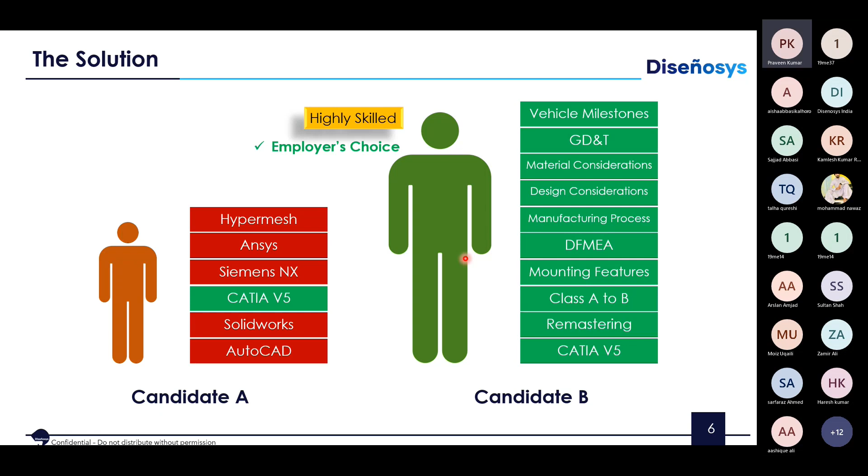So going down to the next topic. Before we begin, we have to understand how an automotive or a car is being designed. I'll just take you through this fast.

Initially, the planning phase will be done where the design engineer or industrial engineer, the management team, or the different benchmarking teams will understand what kind of car is needed.

After the planning is done, it goes down to the designer who does the concept study, and during concept studies, they will make the clay modeling. After clay modeling, they will go for the vehicle architecture.

Vehicle architecture is a stage where the vehicle architecture team will decide where your engine has to come, where your packaging has to come, where your seat has to sit, what should be the height of the car, and how many doors your car needs. So the entire packaging of the car will be done by the vehicle architecture team.

Then it moves on to the detailed design team. Each part of the car will be designed by a separate team. For example, transmission will be designed by a transmission team, the engine will be designed by the engine team, the vehicle body will be designed by the exterior team, and there will be an interior team. The seats will be designed by the seat team.

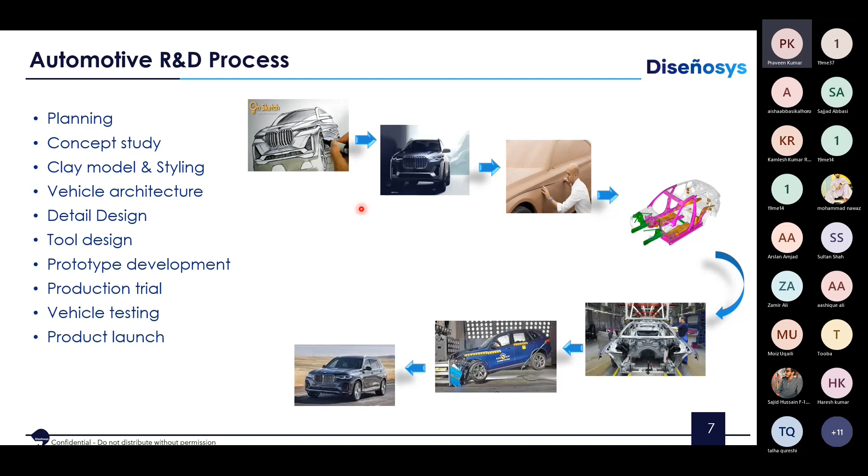My next topic is about understanding what software is required. A lot of people use NX, Creo, ANSYS, and there are many different softwares available. So the question is, what software should I learn? That's the question asked by a lot of design engineers.

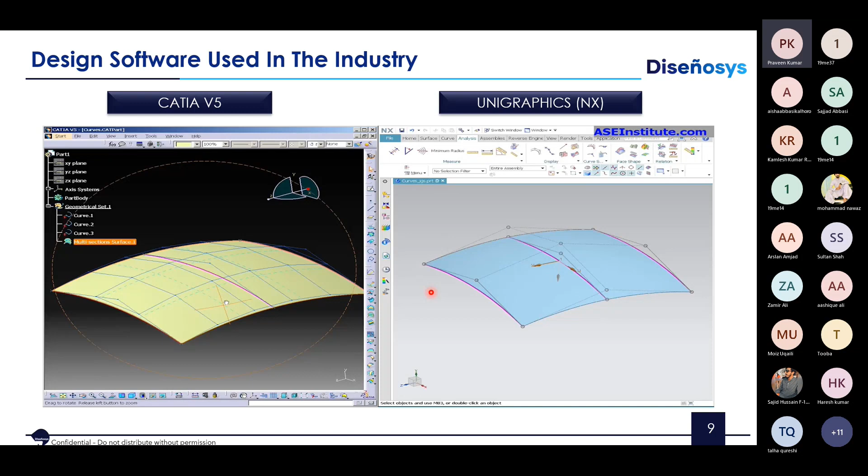The automotive industry mainly uses only two softwares: CATIA V5 and Unigraphics NX. Companies like Hyundai, Toyota, Volkswagen, Ford, and PSA—which is now the Stellantis Group—along with Honda, Renault, BMW, Mahindra, and Tata use CATIA V5. Companies like Nissan, Suzuki, Daimler, Mazda, and Fiat use NX.

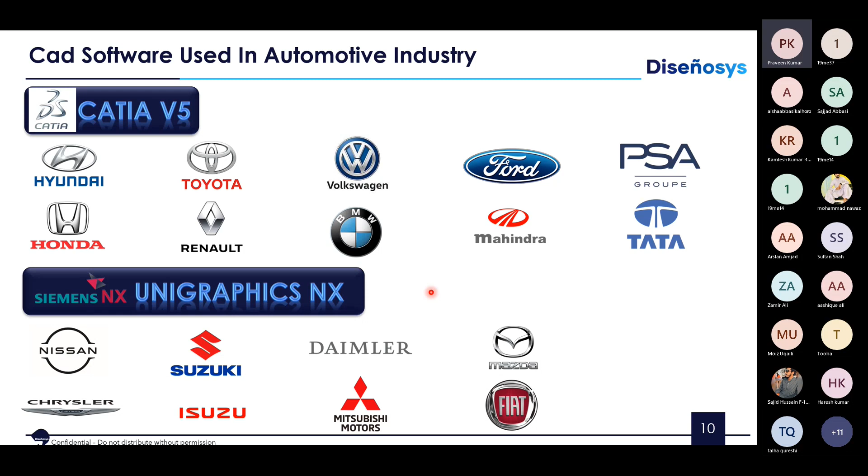A person working on design will not work on analysis, and a person working on analysis will not work on manufacturing. So focus on only one domain—you don't need to learn both design software and CAE or analysis software, because a single team won't cover both; there are different teams working on these concepts. If you're working on analysis using tools like Ansys or Hypermesh, you won't be working on the actual 3D modeling or the NPD activities. So focus on one particular domain and gain your skills there—that is much more important.

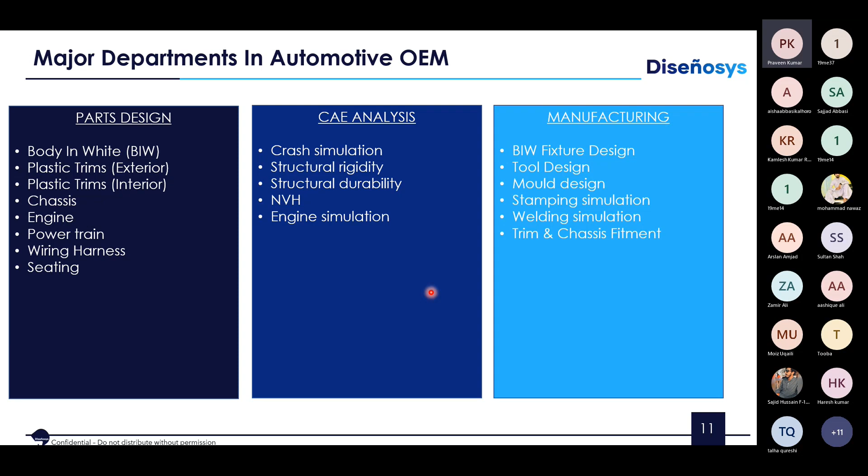Now coming to the different domains in the industry—when we look at any automotive company, this is uniform across the world. From Ferrari to Lamborghini to Ford to Tata Motors to Hyundai, any country, any cars—these are going to be the common departments in the industry.

The first one is the body department, which has both exteriors and interiors. The exterior body of the car is made out of sheet metal, and we call this body in white. Body in white is the outer frame of the car, made entirely of sheet metal. It's called body in white because before painting, it looks entirely white in color. This is the body-in-white frame, and these are the closures—the parts that close the body in white are called the closures of the car.

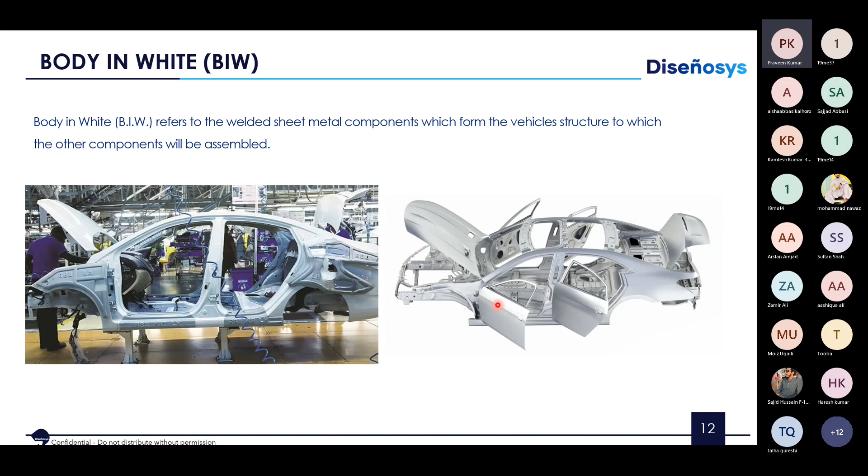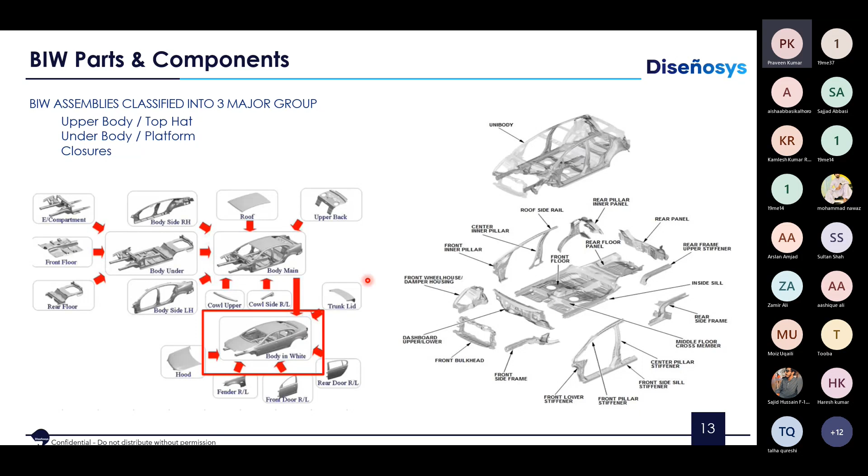There are design considerations required here. To understand how to get into body in white, you need to know the different body-in-white nomenclatures—what components come under body in white—and then understand the design considerations in body in white. For example, if you are making a draw, you need to know what should be the minimum depth of the draw and what should be the maximum depth of the draw.

You can't go beyond the maximum depth and you can't come below the minimum depth. These are basic standards required. For example, why do we need a backdraft? What is a backdraft? Why do we need it? Is backdraft allowable or permissible in the industry?

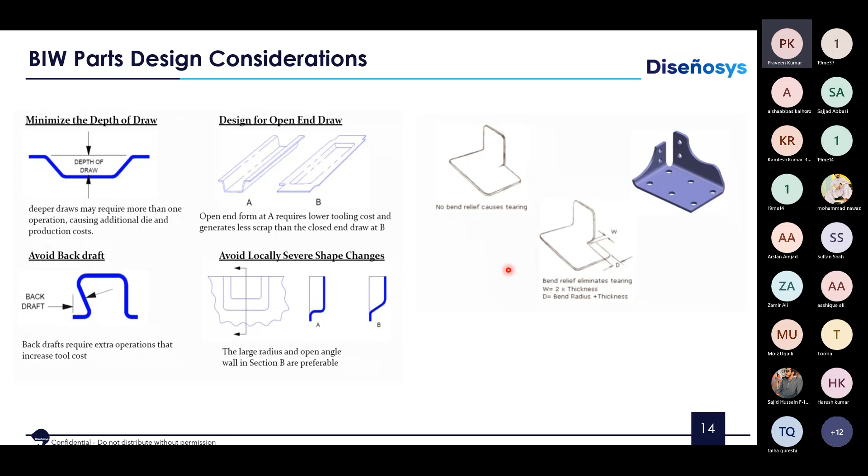What should be the minimum flange length? What should be the minimum bend radius? There are basic standards required which are not being taught in the current university syllabus. And even if it is being taught, different industries will have different standards. But when it comes to the automotive industry, there are basic common standards used across all industries in the world. So you need to understand the basic considerations used in the industry.

Then coming to the next thing is material selection. The body of the car is entirely made of sheet metal, but the sheet metal used here will not be the same sheet metal used there. We'll be using different sheet metal materials in different places. So what material has to be used where? That knowledge is very important.

For example, these red color areas are high impact areas, that is high stress areas. Here you need very strong sheet metal. Whereas the violet color areas, the cowl areas, need the least strength of sheet metal. So you can use a light sheet metal component to reduce the weight of the car. Reducing the weight will reduce the safety of the car but increase its performance. But in areas like this, you can't use light sheet metal because this is where the vehicle has to absorb the crash. You need very strong sheet metal that can absorb the impact of any crash. So material selection is very important.

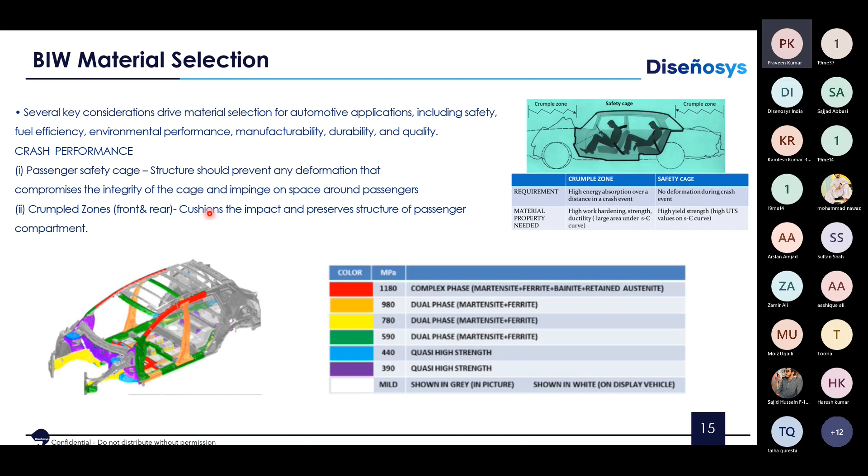So that's exactly what the different domains are. I showed you the basics of BIW. Similarly you need to understand sheet metal plastic trims, powertrain, chassis, steering system, seating domain, suspension, axle, brakes. These are the different domains in an automotive industry. So the candidate has to choose any one particular domain.

He has to choose one particular software, either CATIA V5 or NX, then choose one particular domain and gain all the skills to get employed. Now the question is, what will he do once he gets employed? How to get employed and how to proceed with his career.

If he graduates and gets employed in an automotive car design company, he starts as a GET, graduate engineer trainee, or graduate apprentice trainee. From there he moves to a design engineer position or senior engineer. Then within 5 to 8 years of experience, he moves into a team lead or associate manager position. After 8 years, he can become a design manager or design lead.

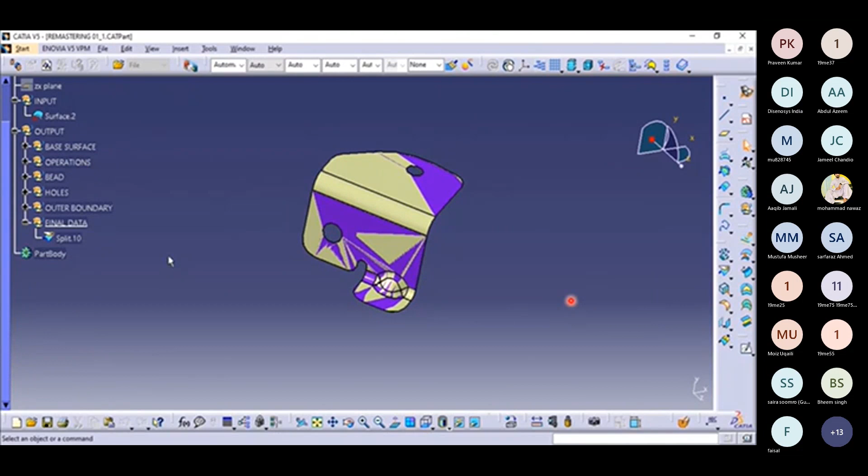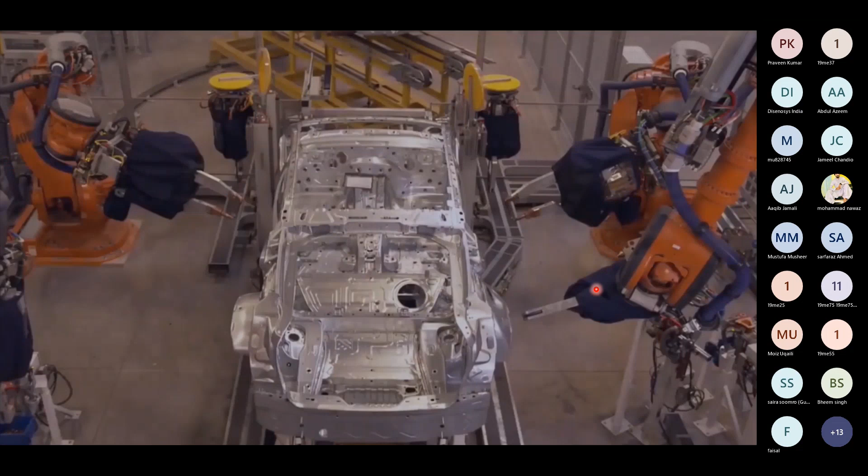So this is what I was talking about, this remastering. The component that you saw was a basic small bracket. It might look very easy to you. When you do that in part design, it's very easy to create.

But in the industry, we don't use part design, we don't use solid modeling. We will always go with surface modeling. So when you start working with surface modeling, doing the small bracket itself will take minimum 1 to 1.5 hours.

That's why doing complex components will easily take around 4 to 6 months of time. For example, if you're working on a big door or a hood design, that will take easily 6 to 8 months, if you're working 8 hours a day, to complete the entire design.

So that's how complex the designs are going to be in the industry. These are the basic skills required by an automotive design engineer and which are expected by the industry. So the next one would be on class A to class B conversion.

So you can just take a look at this video.

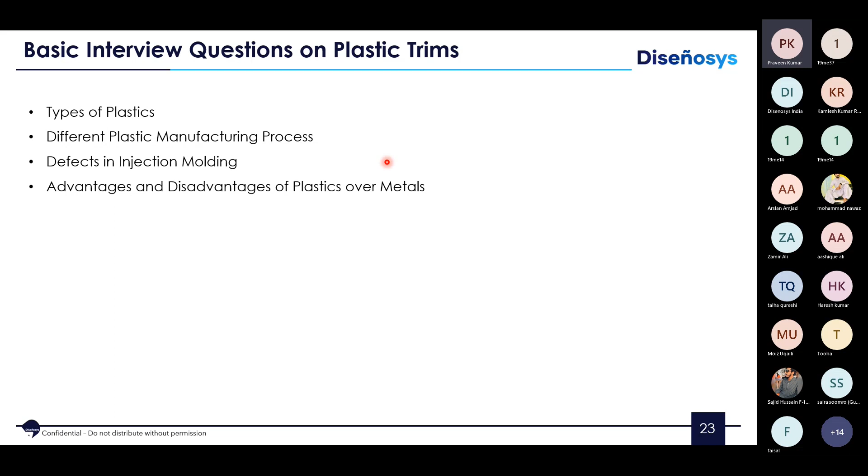For example, if you're applying to a plastics domain, the questions will be on the different types of plastics, the different plastic manufacturing processes, the defects in injection molding, and the advantages and disadvantages of plastics versus metals. When I say types of plastics, basically you have two types: thermoplastic and thermoset. These are examples of the questions that will be asked.

So what are the basic interview questions? What is the difference between a thermoplastic and a thermosetting plastic? Why is a thermosetting plastic better than thermoplastic, or vice versa? What are the applications? You should be able to understand and answer these questions.

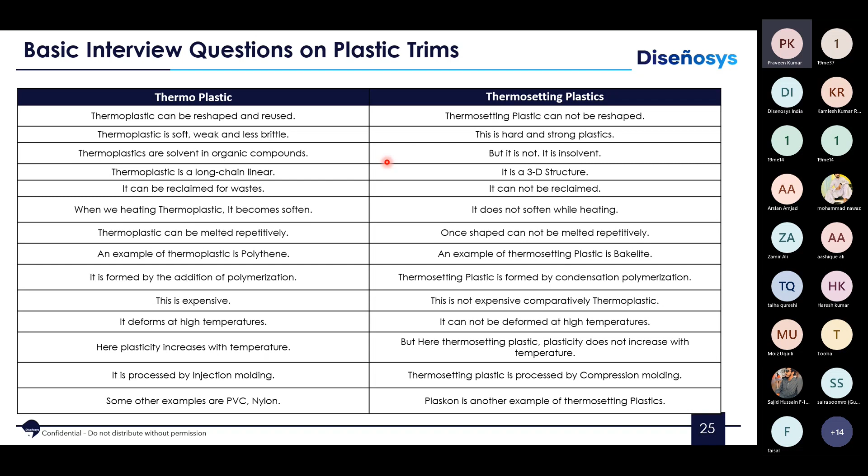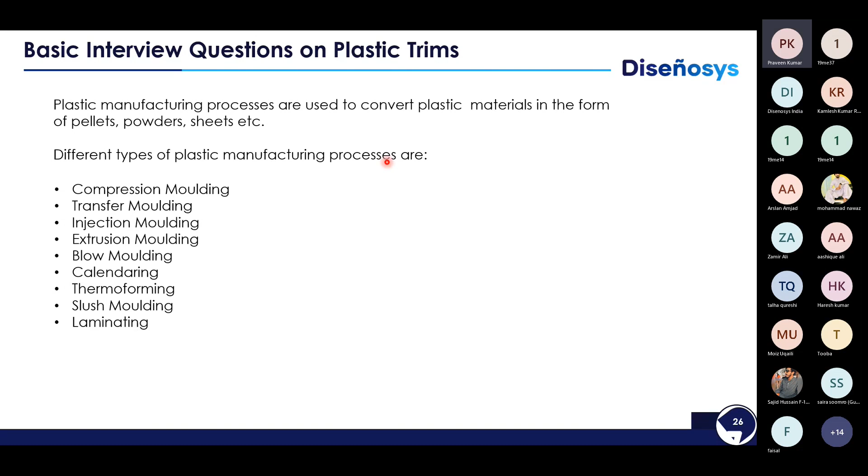Then what are the different manufacturing processes in plastics? For example, you have compression molding, transfer molding, injection molding, blow molding, extrusion molding, calendering, thermoforming, laminating, and slush molding. You should know about these different plastic molding processes.

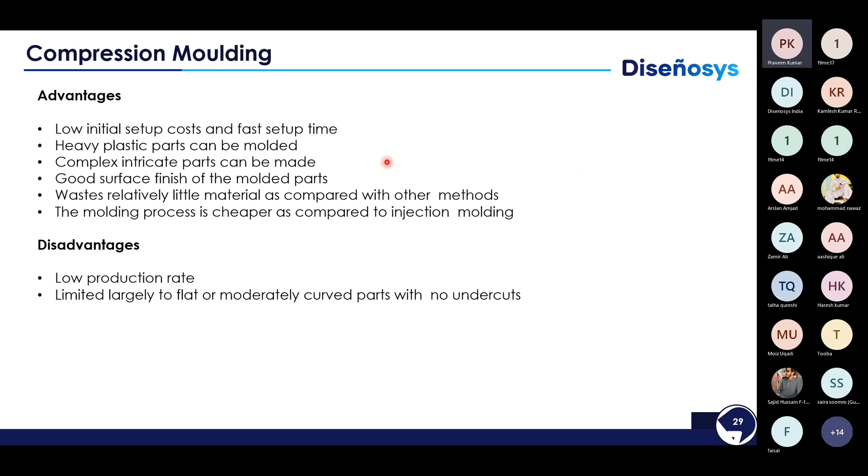How is plastic compression molding done? What are the advantages and disadvantages of compression molding? What are the applications? What components in a car are made using compression molding?

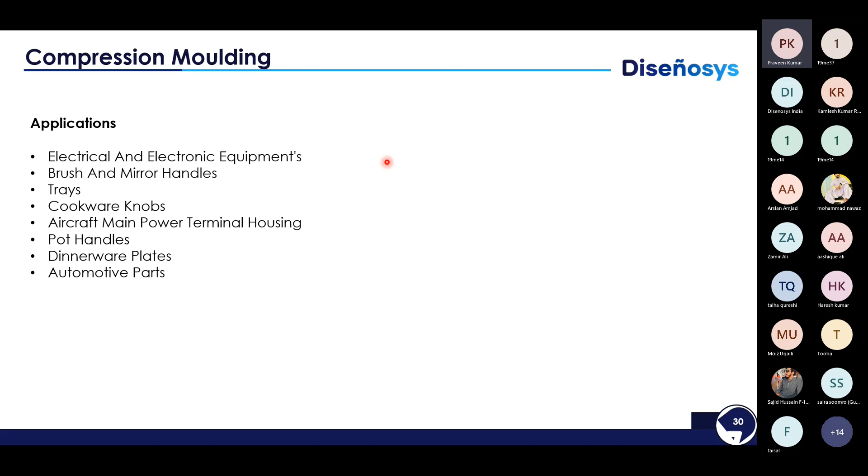Then transfer molding. How is transfer molding done? What are the applications, advantages, and disadvantages of transfer molding?

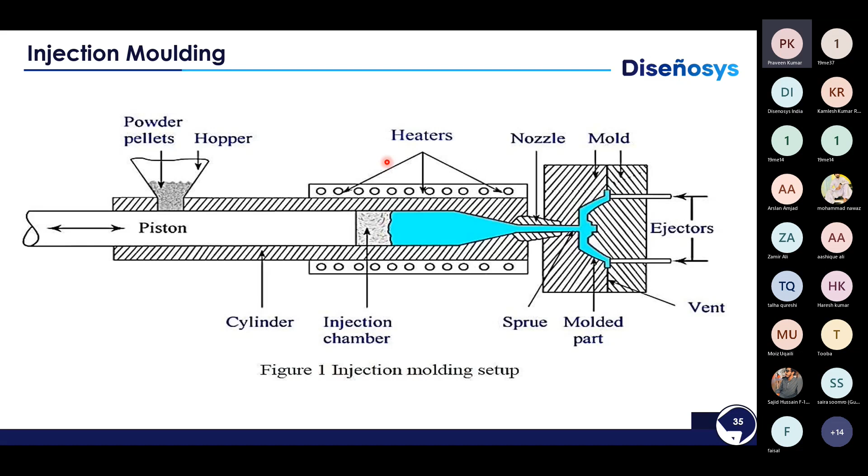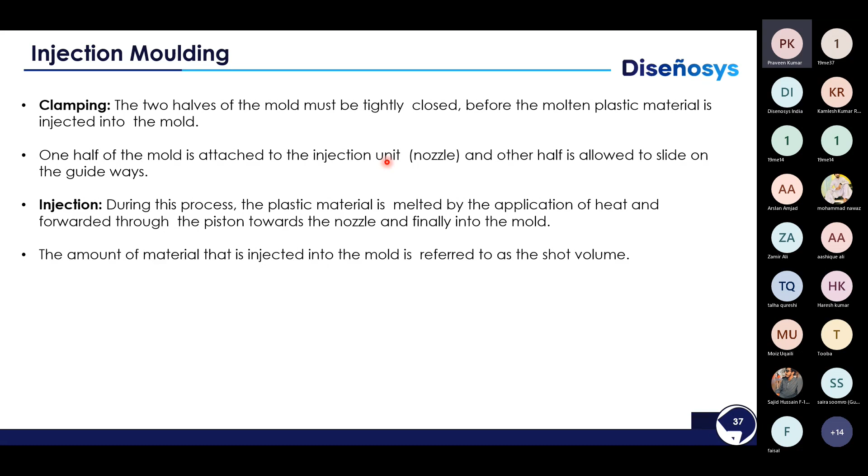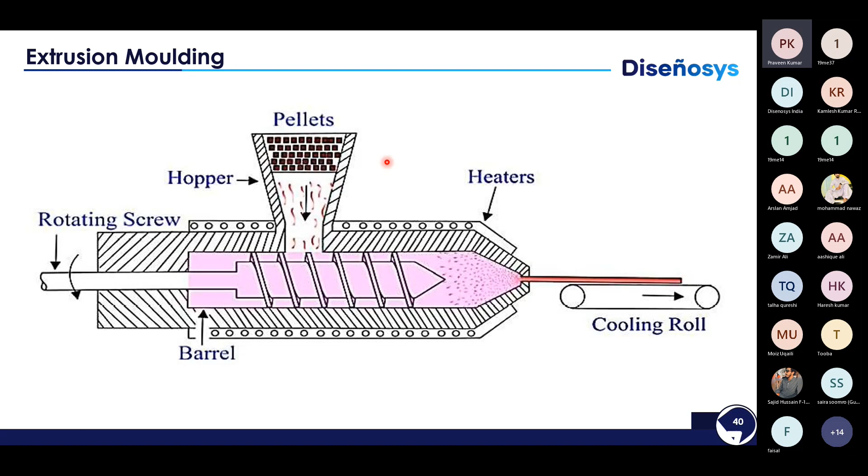What are the applications? Going for injection molding, more than 70% of the parts in a car and in any automotive are made using injection molding. Why is injection molding preferred? What are the different stages? What are the advantages and disadvantages? These are very extensive topics, and this is the actual requirement we expect from a candidate.

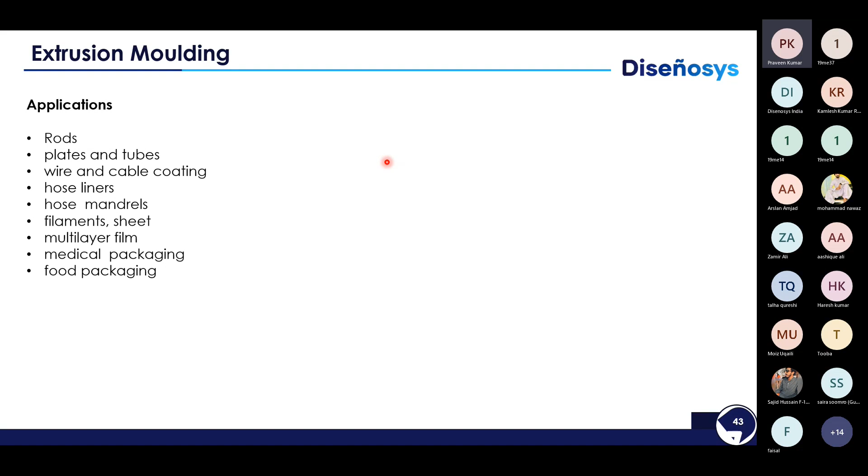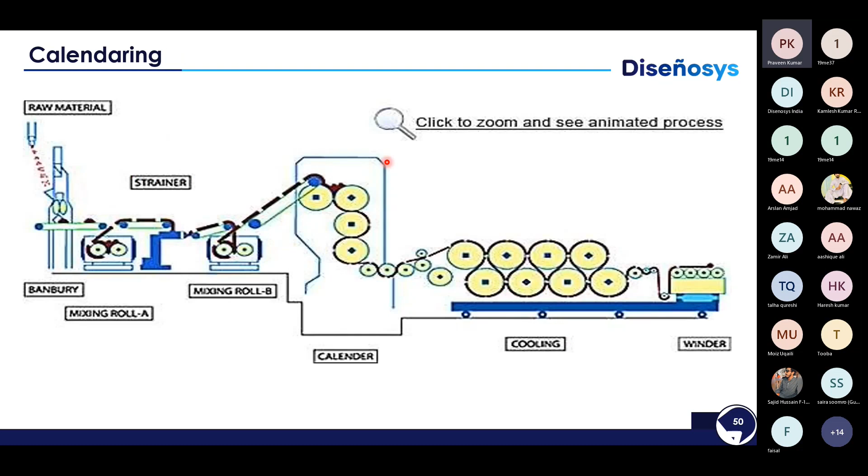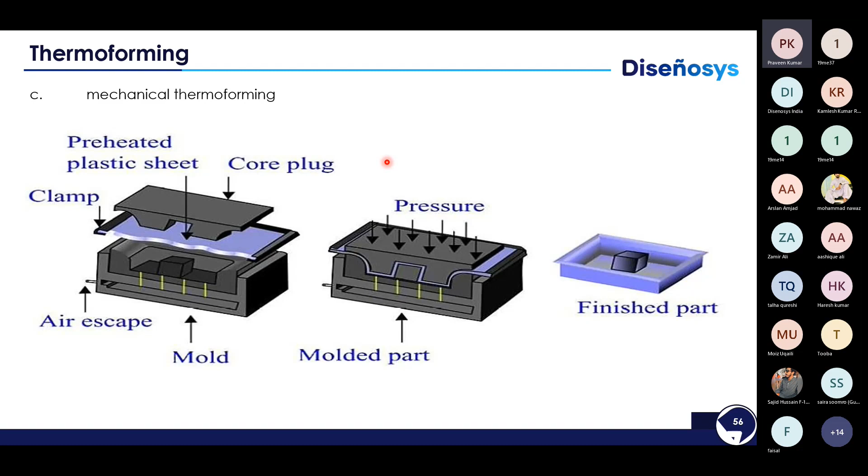When you're planning to get into automotive, you have to have knowledge on these different manufacturing processes, like calendering and thermoforming. What is thermoforming? What are the different types of thermoforming? Why is thermoforming used? What are the applications of thermoforming? Why can't we use injection molding instead of thermoforming?

These are the questions that will be asked. So right now we just saw a couple of questions, but similarly, you should know what are the defects. When I say defects: what is a flash? What is flashing? What is warping? What is a bubble? What is a shot mold? What is a sink mark? What are flow marks? What are pin marks? Why do you get pin marks?

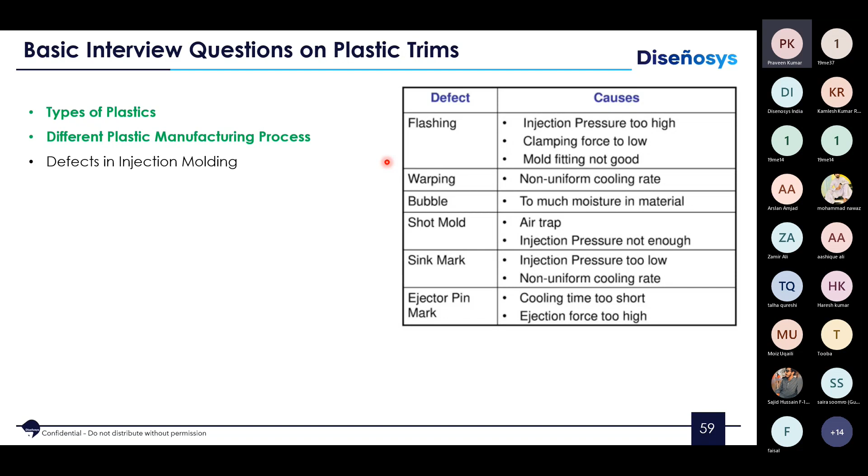For example, if you are getting a sink mark, why do you get it? How do you troubleshoot a sink mark? How do you make sure you don't get a sink mark? What are the causes of sink marks? As a design engineer, you need to understand where a product will fail and how to avoid that failure. That is very important for a design engineer.

Then, what are the advantages and disadvantages? What are the materials? What is a slider and lifter? What are undercuts? What are the different gates we use in plastic? What are the different plastic grades?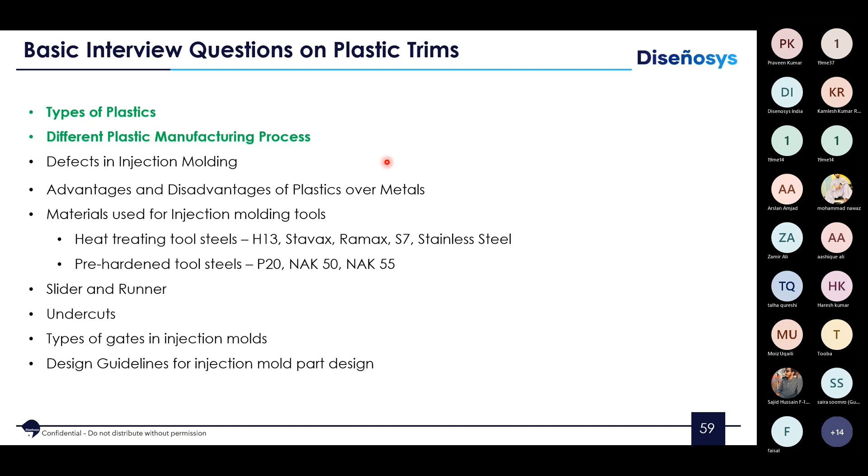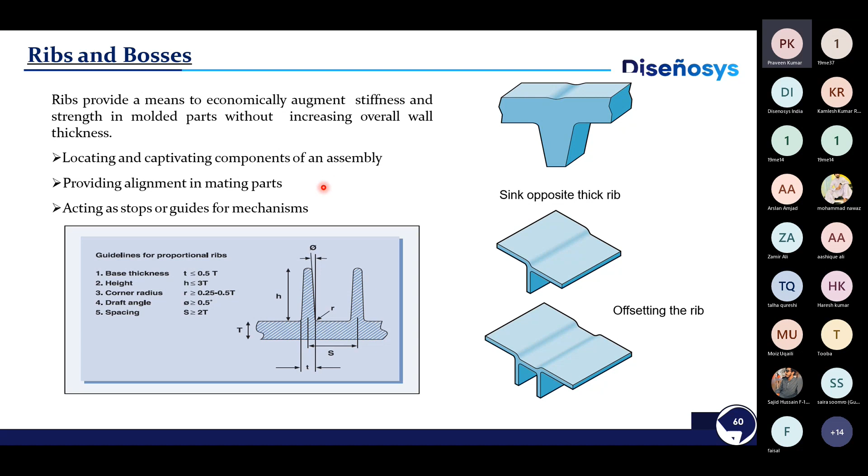What are the different grades in sheet metal? What are the different design guidelines? For example, if you are going for a boss, what should be the height of the boss? What should be the minimum depth? What should be the thickness of a rib? If I am going to design a boss, what should be the thickness? What should I keep as stiffeners on the side of the bosses? What should be the minimum thickness of the stiffener? What should be the fillet radius of the boss or the stiffener?

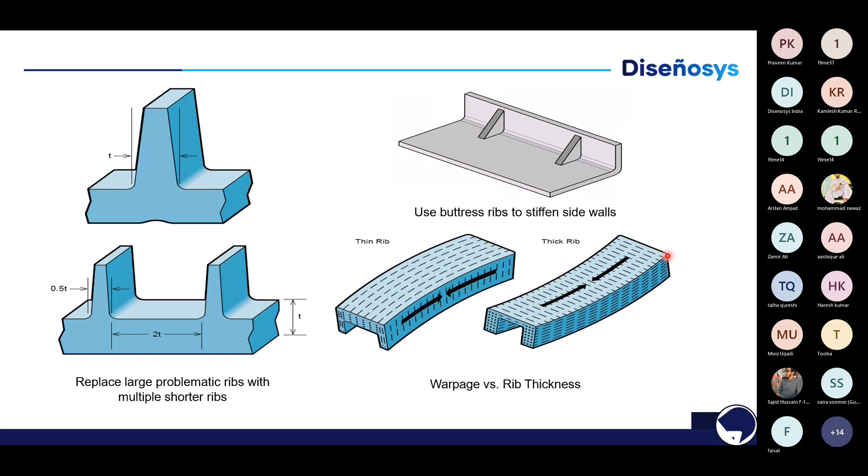There are different guidelines. So these are the stiffeners. What should be the minimum thickness? Then under the boss, what should be the diameter of the boss? If I'm going to go for fillets, what should be the radius, minimum radius? What should be the inner radius, minimum radius of the bend?

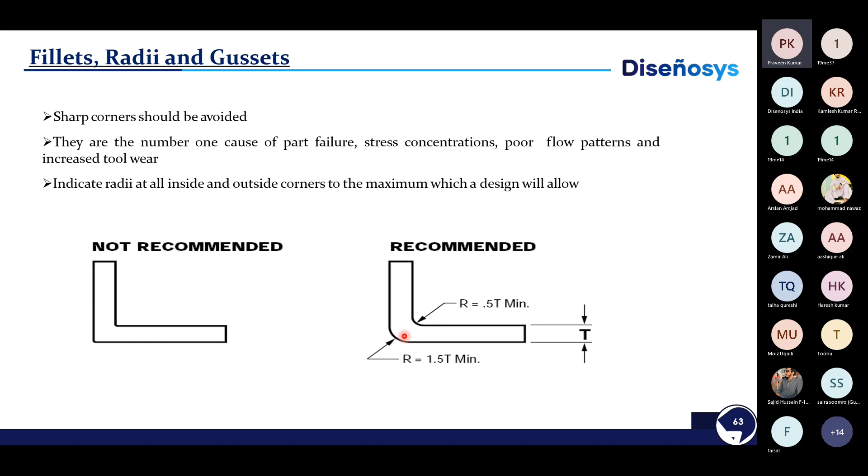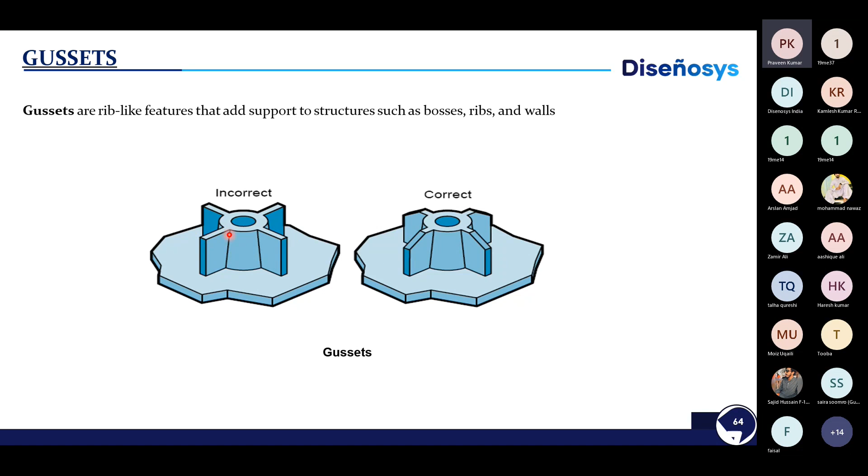If I'm going for a gusset, what is the proper way of gusseting? When you make a gusset, you have to ensure that you have chamfer at the four corners. You can't make a sharp corner for a gusset. Draft - these are the design guidelines.

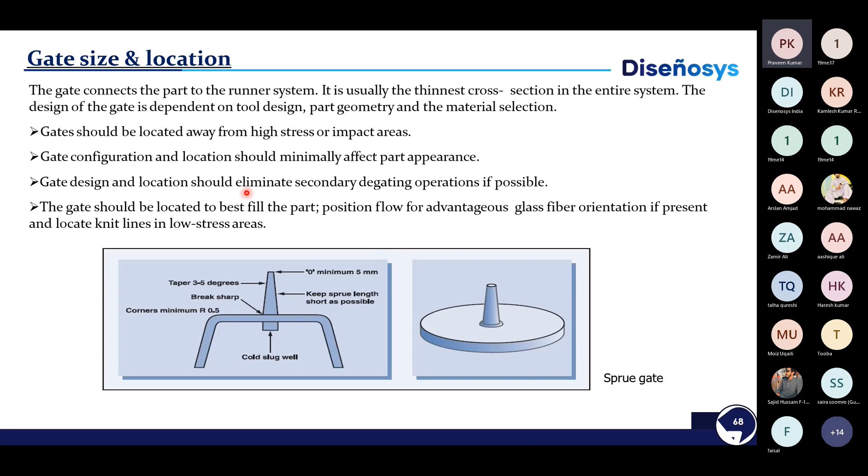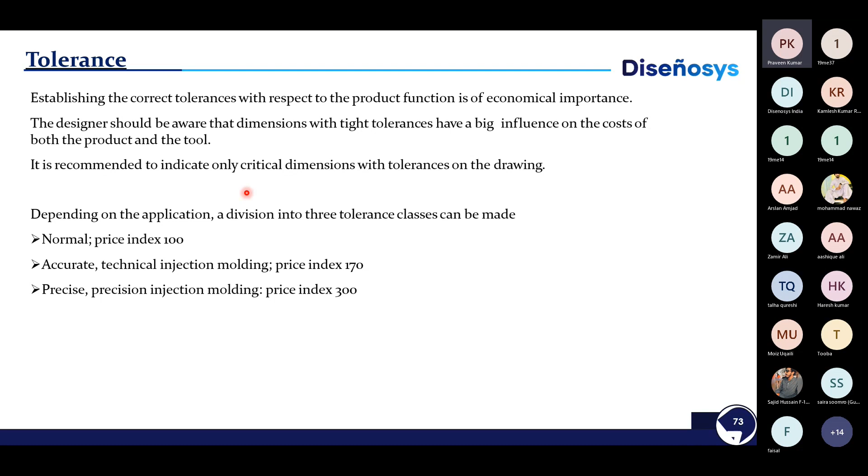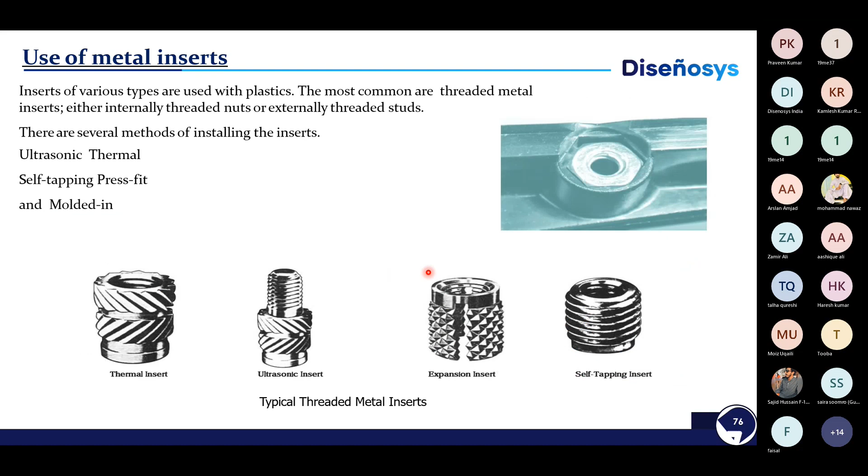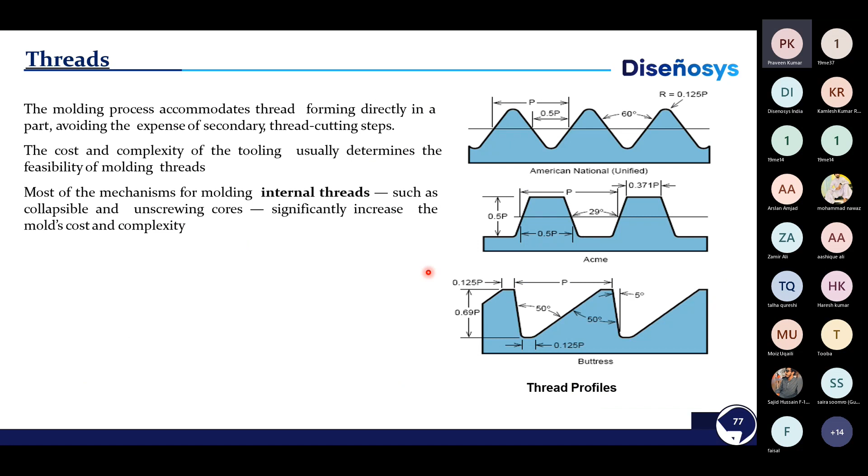So these are the basic guidelines required for a design engineer. The point is, to become a design engineer, just learning the CAD softwares alone is not enough. You need to have extensive knowledge on the materials, on the design guidelines, and on the manufacturing process. All these are required to make you a proper design engineer. And this is what an industry will always expect from a fresher.

So right now, I have completed my presentation. If you have any questions, or any specific questions to be answered, then I can answer your question now. I hope the session was informative for you.

I got a question, sir. Yeah, thank you. Please go ahead.

Sir, as a student, I am a student of computer systems engineering of final year. What process should I get through to join the industry of automotive design?

Okay, so you are from computer science, right? Yes. Okay, so as a computer science engineer, see, an automotive industry doesn't employ only mechanical engineers. We have electronics engineers who work on sensors. We have electrical engineers who work on the complete electrical wiring of the car. We have mechatronics engineers who work on the ADAS advanced driver assistance systems. Similarly, a computer science engineer will always work on automotive design. For example, if we are working on some machine learning, advanced automotive design, we need people who can do coding on Python. So there are a lot of departments in the automotive industry where Python is used.